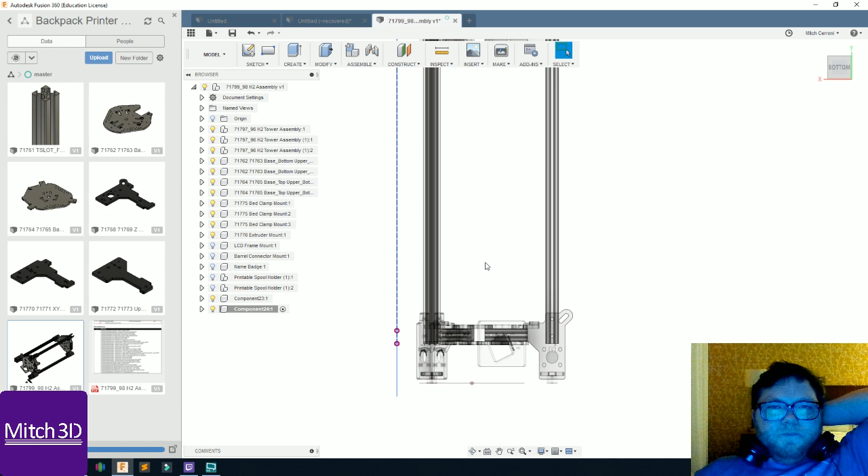Okay, so I kind of started planning a lot of this out for the backpack printer. Okay, cool. So I want to create a bird air. So first I was able to import the model from the GitHub. SeeMeCNC had the whole model of the printer in SolidWorks on the GitHub.

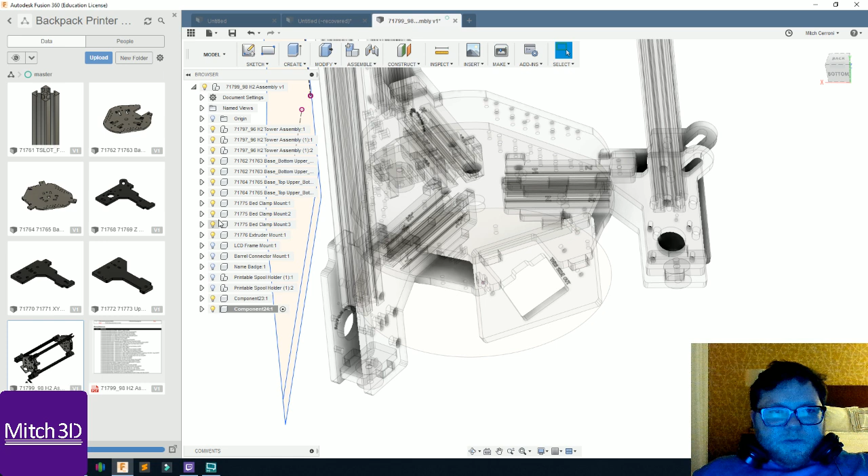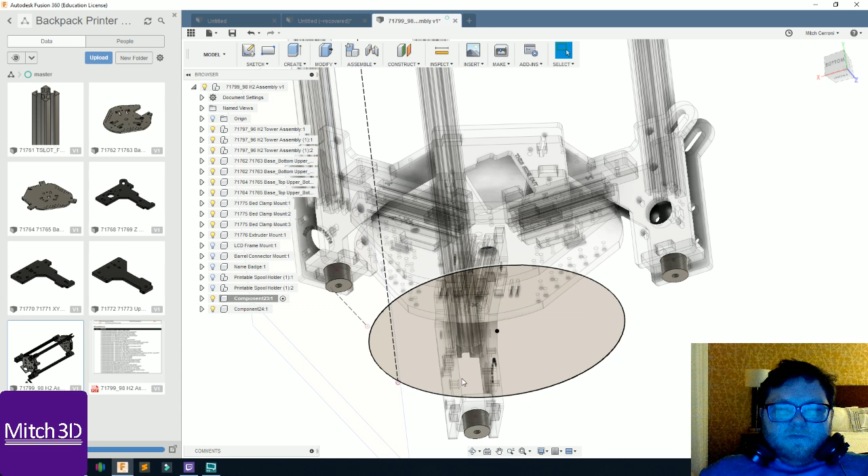And so what I did is I started sketching the frame. It's not a good sketch, I'm going to redo it. But the main thing here is that I started finding all my components, or starting making my mounting points here. So I'm going to utilize the existing feet. Let's click on activate that component. So right now we have our 8mm spacers that I'm going to mount to where the existing feet are mounted to, and then that will be mounted to a frame.

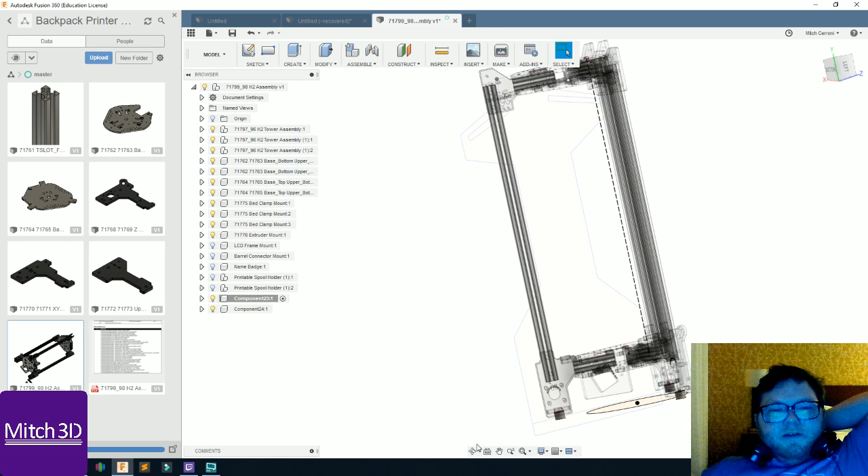I'll basically have a little shelf here that's going to be mounted to the backpack frame. So this frame, I'm still debating what I'm going to make it out of. The easiest way is going to be CNC routing it out of plywood. Since I'm going with a little more aluminum parts on this model, I'm thinking about actually machining this out of aluminum. So I can machine the plate out of aluminum. I could either plasma cut or water jet it. The main thing is to make it really lightweight.

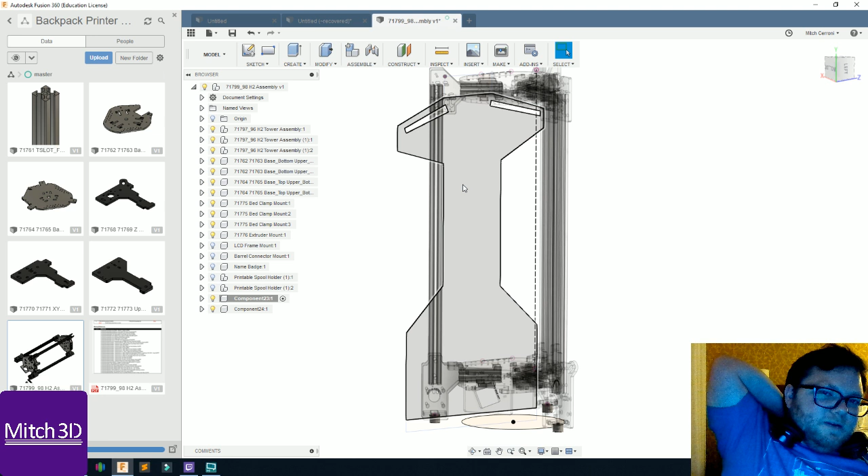So I unfortunately am not in town. So what I was going to do is put the straps on and the waistband from the frame backpack, because I have to design this to fit my back. It has to fit my shoulders the right width and the right height from between the back of my shoulder blades, which is where the pad's going to be, to the lower lumbar support back brace, and that measurement is important.

So I'll show you what I have so far. You get to see all my super duper stuff. I got this purple braided wire here, and that's going to be for my wire loom. Off camera, I made the wire whip for the effector, so I need to put this wire loom around it. I haven't opened the bird air. I just got the bird air pump, so I'm gonna run the bird air tubing through the whip and the Capricorn Bowden tube as well.

I had to get a replacement 12-volt fan because I broke the one on the Mosquito. There's those Speakon connectors here. Let's see, I got that workbench, that was pretty cool. Some robot parts, heat shrink tubing. Here we go. Okay.

So this is the frame backpack I'm using, but I'm not using the actual frame part. I only bought this because it had pre-made straps, and those straps are way more comfortable than the previous version that I had. The problem is there's so much extra on this frame that it's really cumbersome. It's really huge and bulky. Let's see if I can get a full-size picture.

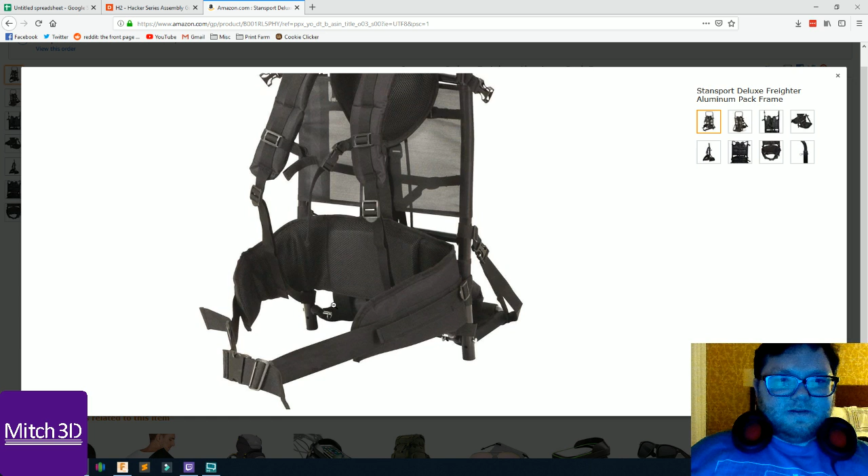Okay, so ideally what I want to do is take this middle back shoulder support and attach that. So the aluminum frame would basically only be the size of the back support right here, like the size of this square. It would probably taper up here, so this part would be a real thin part, because all it needs to do is hold the two pieces together. Even if I make it out of plywood, if this part was only like 4 inches wide, it still has a lot of torsional strength.

The idea is that the backpack frame is not going to bend on my back, and that's also adding rigidity to the printer frame. And the other important thing here is this strap for the waistband goes around the metal piece all the way back here, so this is just resting on the metal bar frame. So this part can actually come off. These two parts can be separated because they're only connected by this one strap here.

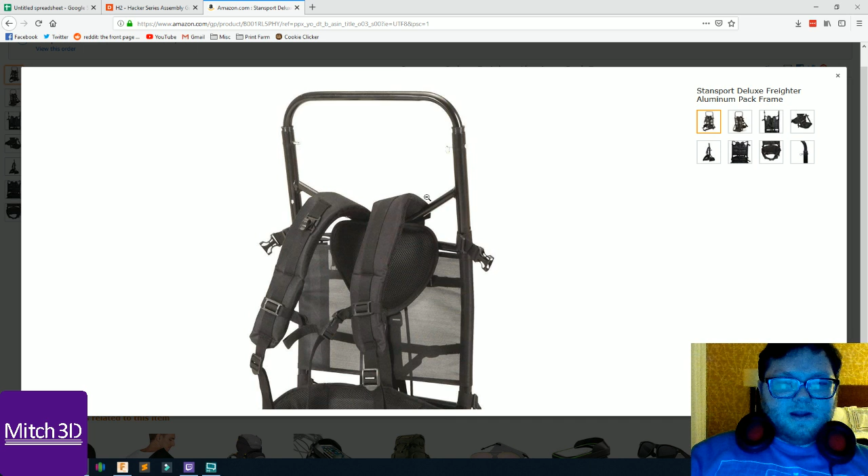And then up here, all I need is basically two little loops up here at an angle. I don't like how they do the angles inward like this way. I would actually do it outward so that it contours around my shoulder like this. It will kind of angle out and in.

Because the printer is always trying to lean back on me, so it's trying to pull my shoulder blade pads apart. So this center chest strap is really important to keep those together, because I had to constantly adjust it. The other thing too is adjustable straps here and here, and then this clasp right here is like 2 inches thick. It's huge. It's way more comfortable than what I was using

before. Before I took a fanny pack and took the straps off the fanny pack and sewed them into the frame of the backpack. But I don't like the fanny pack idea. Yeah, this has a lot of extra straps, and I mean, I get the point. It's a hiking backpack. It's supposed to carry a bunch of stuff. You can see this lumbar support is way more heavy duty than what I had before.

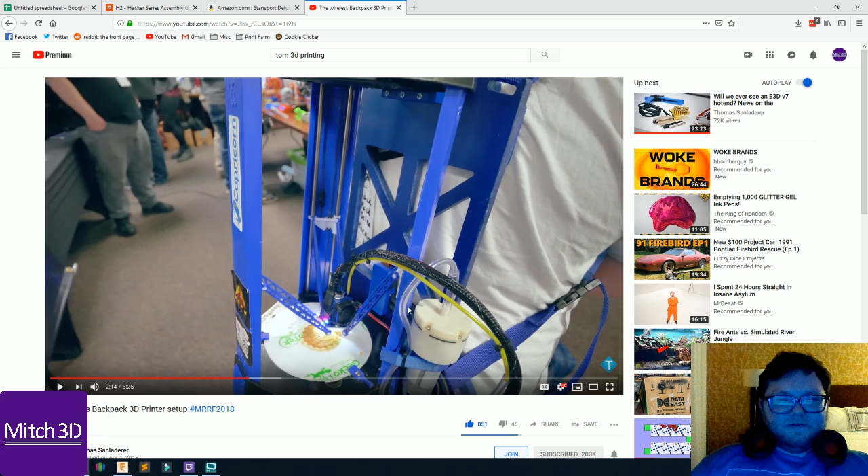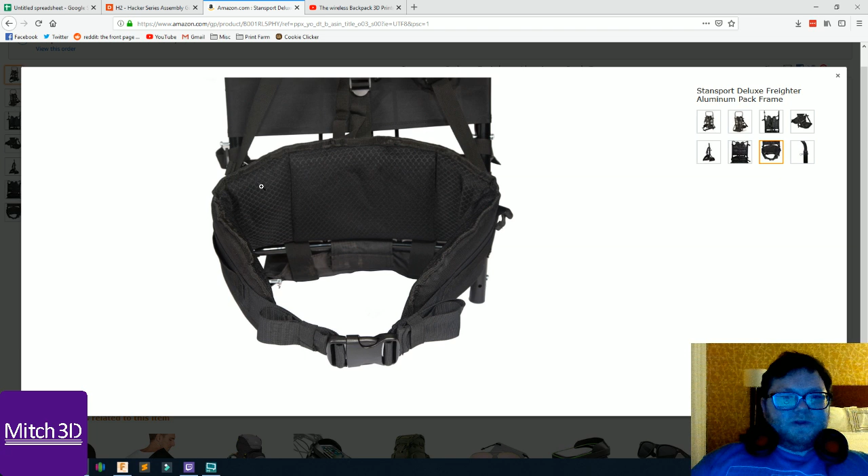Okay, so if you can see, the back support was just this wide part right back here, and so it was only just a little piece. It was a piece of foam. Here it is. So you can see I added a bunch of foam as kind of a padding spacer here to bulk up this area, and I made these little winglets, which are supposed to be kind of what this is right here. But I didn't make it big enough. So really the straps are just digging into my waist, and again here, the straps are just digging into my side.

I couldn't think of how to do that. And my roommate actually was the one who sewed these together. But the problem is she had to sew them after I completely built the frame, so she couldn't get her sewing machine close enough to make these straps tighter. And so I didn't have a lot of adjustment, and I had buckles for each side of the strap.

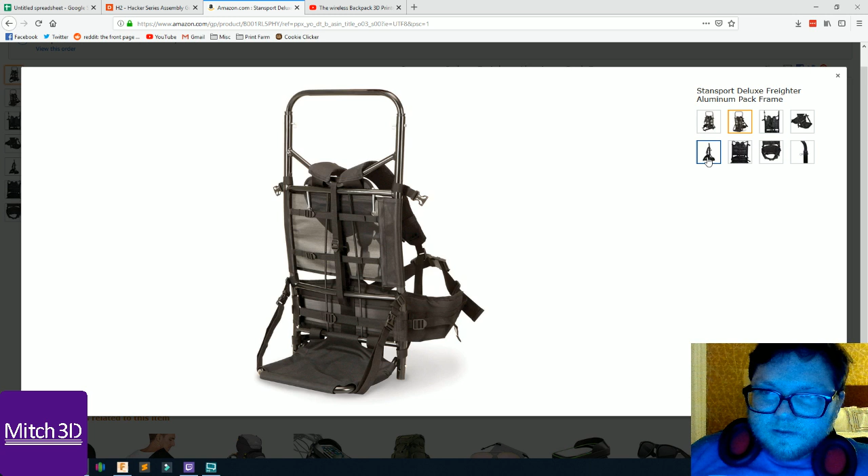This one doesn't have those parts of straps. So I actually do need little loops at the corner of the bottom of the frame. So I'm probably gonna have to make little hook loops here, a loop here and a loop here, and then strap the loops here to that loop. So I might have to cut these open and sew them back, or stitch them, or probably rivet them back.

So the idea is that I'm not trying to do a lot of modification. I want to be able to take the strap parts off the frame easily. So this will probably be attached with, I don't know if I'm gonna try to sew in, I forgot what they're called, but the eyelets basically. So I could use carabiners, or some kind of hook and latch kind of system.

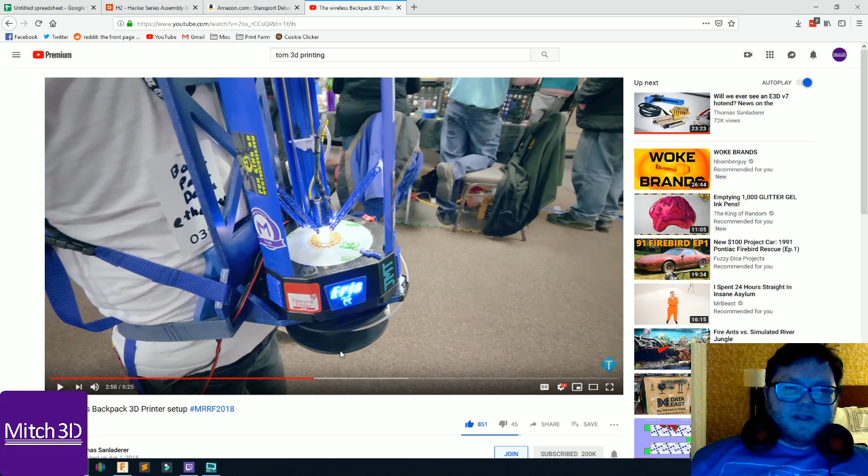I thought about just sewing Velcro to the back side of each one of these and just Velcroing the pads on, but that means the whole thing would be held on by Velcro, or it's only going to be held on by these two straps here, and this bottom section is just going to be pushing against the back. So it seems like all the weight's basically pushing back against my shoulders and on my lumbar. So the more cushion I have, the better.

The other thing that was annoying, let's see if I can find it. I'm just seeing how cool that was. I made that adapter with the Berd Air, and I'm hoping to do that again. But anyway, the annoying thing too is right here, I had a little tiny piece of foam between my shoulder blades, and it kept getting in the way of my shoulder blades, because it was rigid foam, EVA foam. So anyway, hold on, let's see.

So anyway, if you have any questions about the backpack printer, let me know. Because I never really did any documentation on this backpack printer build other than this video, and honestly, this video did a good enough job that I really want to just republish this on my channel. I'm gonna have to email Tom about it.

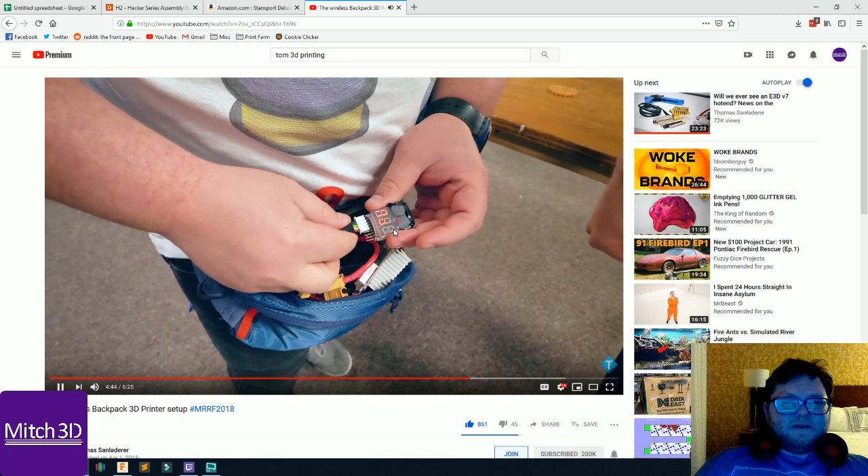So this is the fanny pack. I used a DC to DC converter. All of this was in batteries here, about 16 volts. The 5-volt regulator on my Rambo board will probably fry if I did that directly. So those alarms are super loud. A 5-volt regulator. My USB output was from my Pi. And you're getting the voltage monitor as well.

I'm using all the XT60 connectors so that it doesn't break. It just gets a little warm. I'm also using the fanny pack to hold my glue stick, business cards and my maker coins. So you're a mobile printing machine. It hasn't been too uncomfortable. I've been walking around this convention 3 or 4 hours and haven't had any problems wearing it. How much does that weigh on your back? I haven't tested it, but I'm assuming probably like 15 pounds, 6 or 7 kilograms. That's annoying.

Okay, I want to create a box that has, let's see, battery and electronics mounting. So I want to create a box that has kind of like, I want to take the same LiPo batteries, but I want to have them in a cartridge, kind of like that, but simple. And what I was going to do is, without having to resolder anything, let's see, let me create a new file.

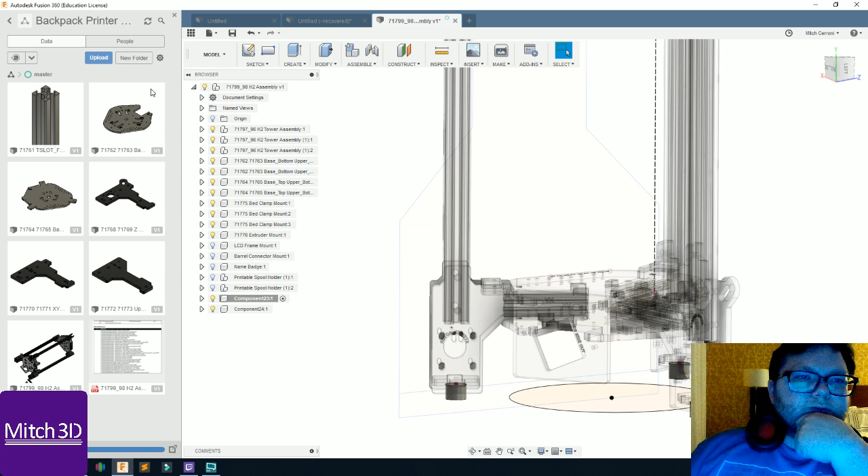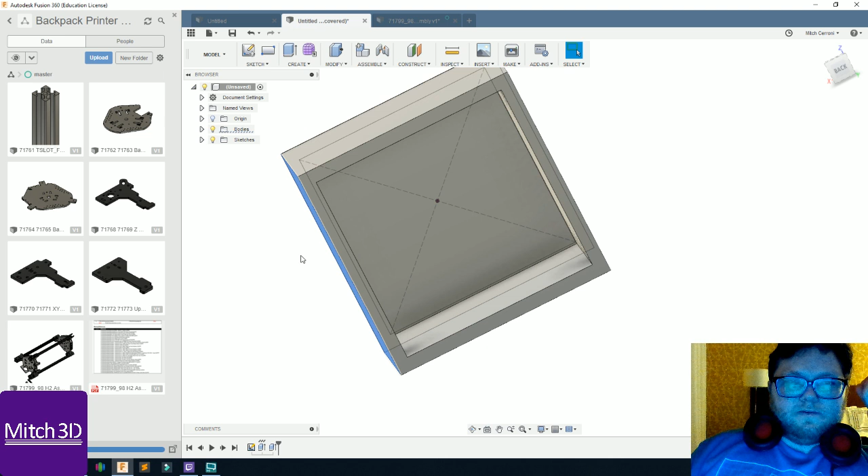Actually, I started one. Okay, so this is part of a model that I created. This would be an end cap. This end cap would stick onto the battery, and then inside here I would have... Okay. So I want to create a rectangle. Let's see. I can't spell, but anyway, using this as a reference. So it's 15.735 by 8.126. 8.126. 15.735.

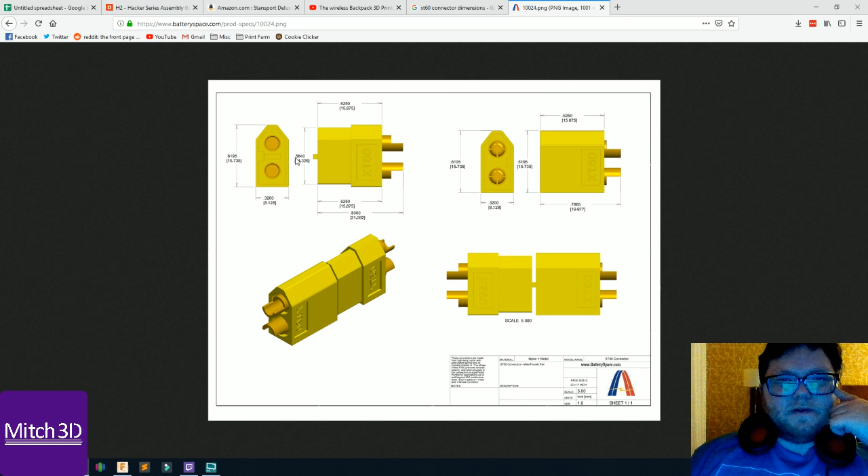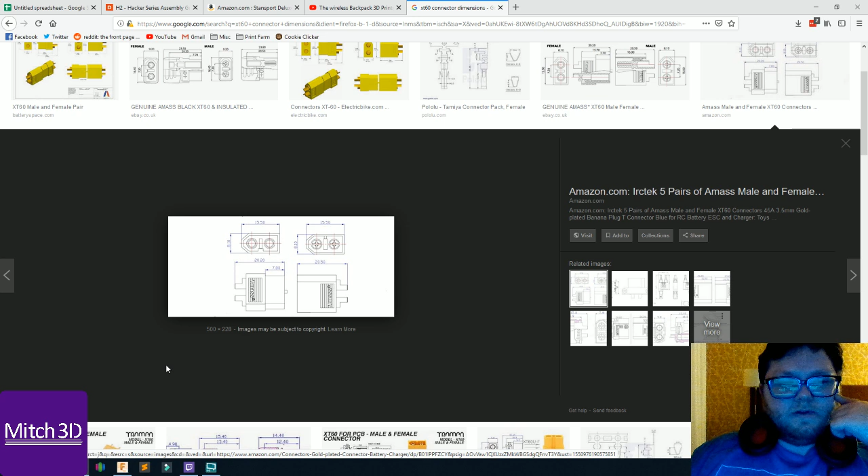Okay, the only thing I can't figure out, and it doesn't really matter, but it kind of does, is the taper here. I don't know what that taper is. It doesn't tell me where the taper starts, what angle it is. It looks like a 45-degree angle. And yes, I could probably import a model into Fusion, but that seems kind of complicated. It tells you where the center points are, but it doesn't tell you where the taper is. So, but just for prototyping, I want to try this.

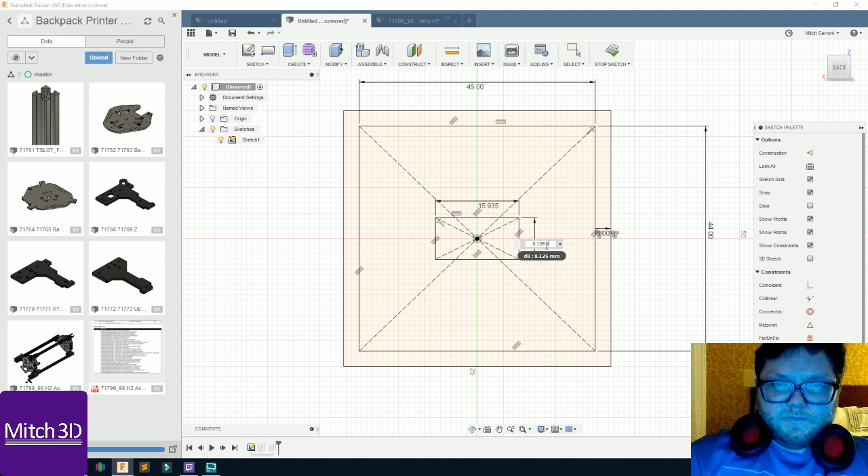So if I make this, I want to round up a little bit because I need tolerances in my model. Let's see, 15.735 plus 0.2. That way we have a standard tolerance. Okay, cool. So we have a little bit of tolerance, and what I'm going to probably do is add a bead of hot glue around. So let's see. Okay.

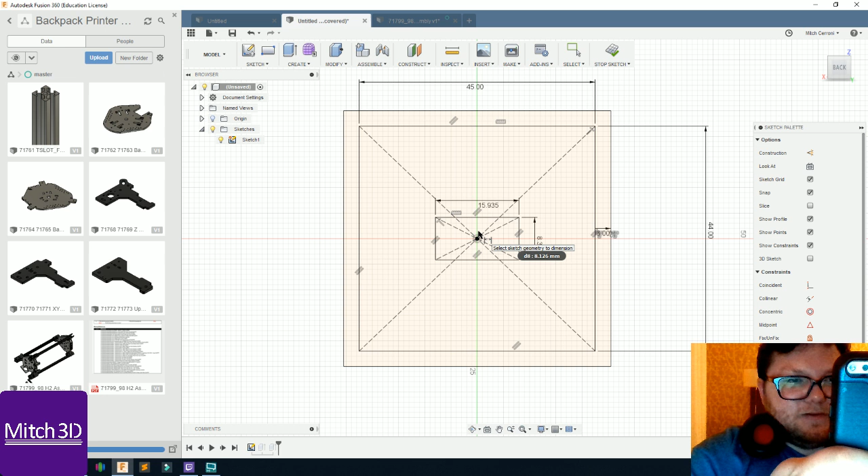Wow. That's awesome. Friends having a party, and it's really neat. With a DJ and a light up floor. Okay. So I can't do streams because I'm so distracted.

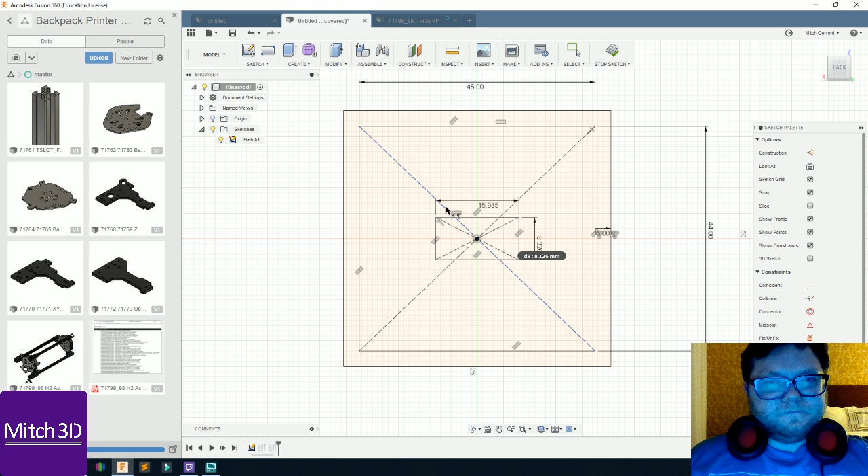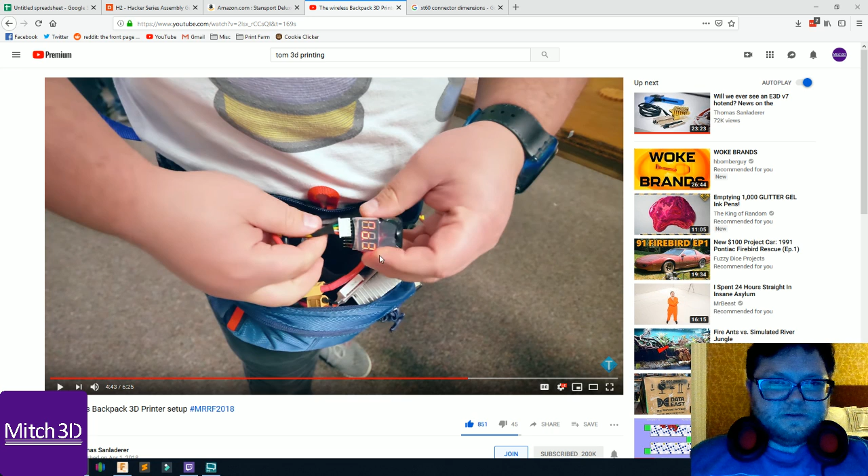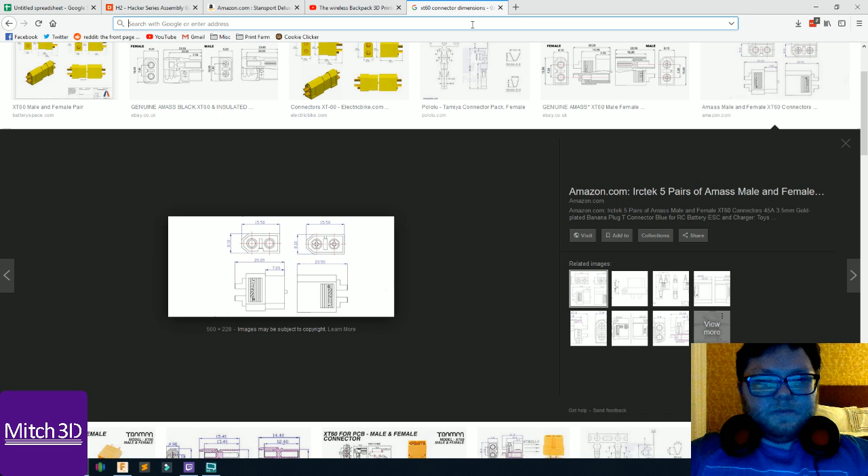Okay, so the other thing that is an issue, what I want to do, this sounds like a pain in the butt, but these little alarms right here, these alarms have a 5-pin connector for a 4S battery, so ground, and then the 4 cells, and then it measures the voltage per cell. So I need that connector right there. LiPo balance connector. Dimensions. What are they called?

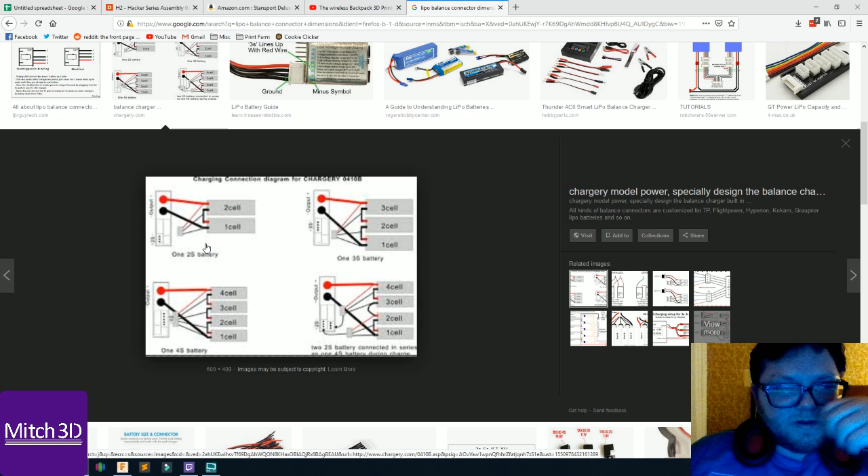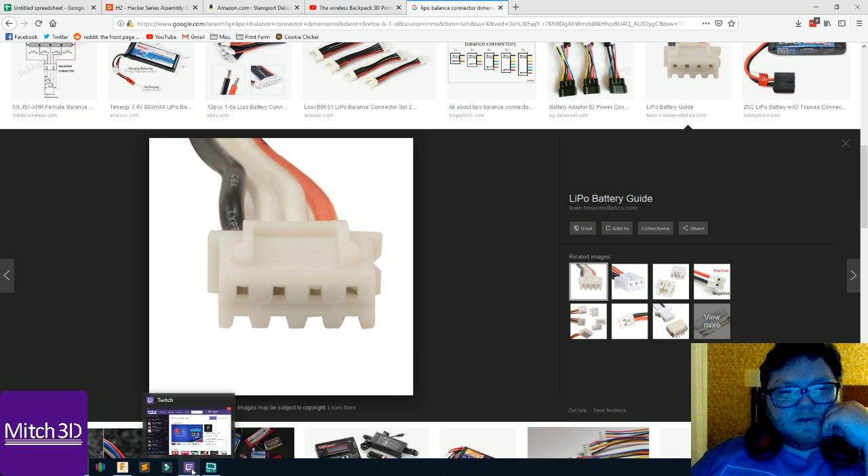Okay, they're JST. Pretty sure they're JST style. Again, I don't have the model of them exactly on me, but since it's parametric, I can just go back and fix it. I think they're probably about 3mm by 5mm. I was going to say 3mm by 6mm. They're real small, so I'm gonna just add a...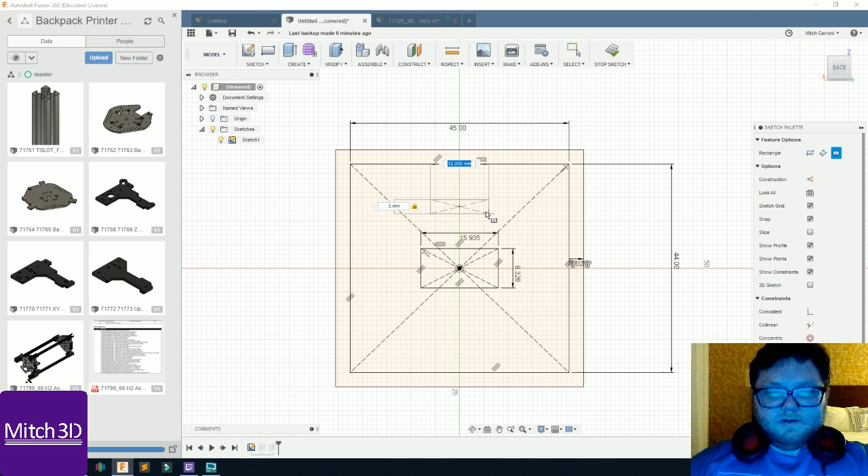That's probably 8, 3 by 8. Okay, so anyway, I'll make that bigger.

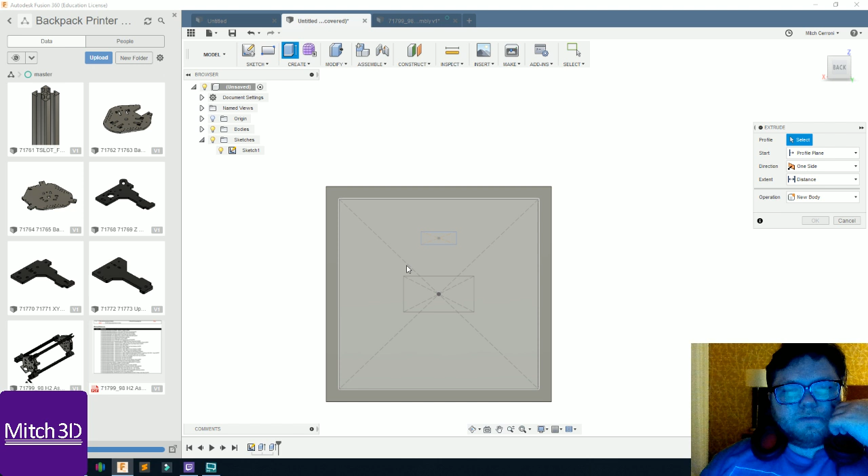So stop sketch, and then we'll push pull. Trying to figure out a more efficient way to navigate this, but okay.

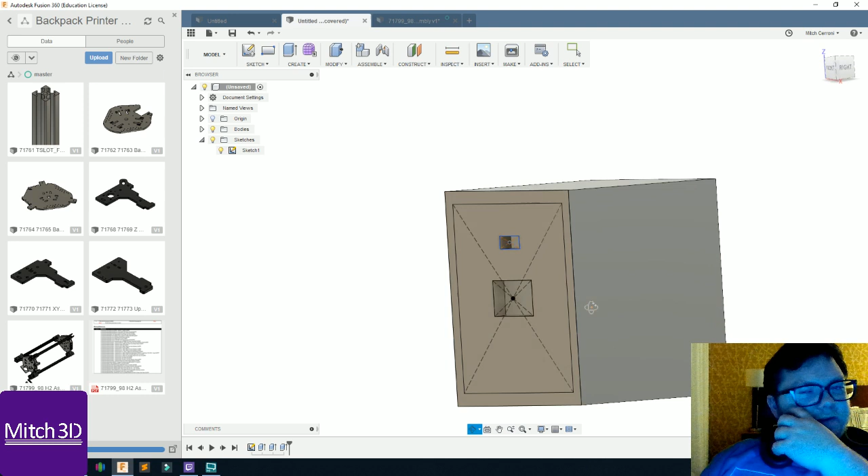Ideally what I'm going to do is stick this on the end of the battery. Just going to show you what these are - Turnigy energy, 5000 milliamp hour 4S battery, hard case.

Yeah, they were really expensive - not the graphene ones, but the cheaper ones, the 20C. They're actually cheap, but the problem is they're out of stock, and when I could get them, the shipping was expensive because it was from China. It wasn't actually from - let's see - Turnigy. So, not that I'm going to get it done by then.

I'm going to use the same battery system as I did last time because the printer is going to draw about the same amount of current at the same voltage.

Those are about 27 each, and there's the link for them. So I have two of these. I put XT60 connectors on them, and then I ran them in parallel, so I have a Y connector. Looking at Tom's video, he uses a diode system.

Oh, is it Friday night hangout chat? Oh, man, I didn't know about that. I'm in all the chats, but not that one, apparently. Askew View, he's doing one. See, I don't get push notifications for some reason.

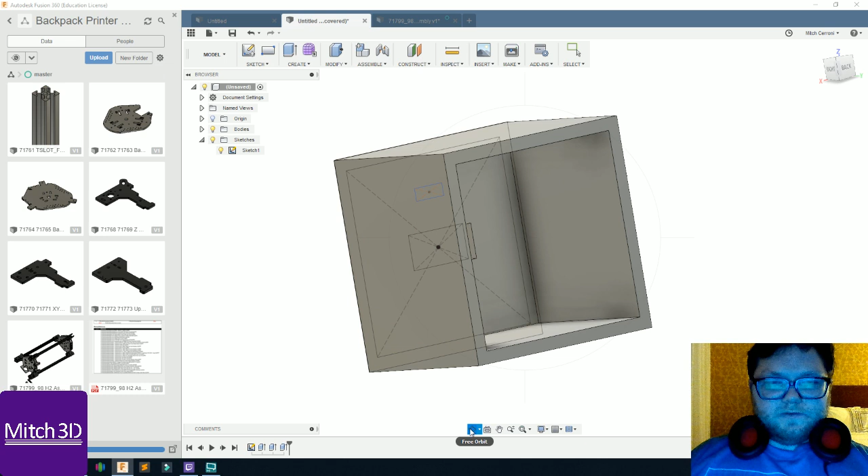But anyway, I just wanted a short breakdown of this video. I'll probably be CADing while I'm on the other stream. But I just want to show you kind of what I'm doing. So the other thing I'm going to do is probably chamfer these edges, and then build a receptacle for this, so this will actually plug into a socket, and the socket will have another XT60 connector.

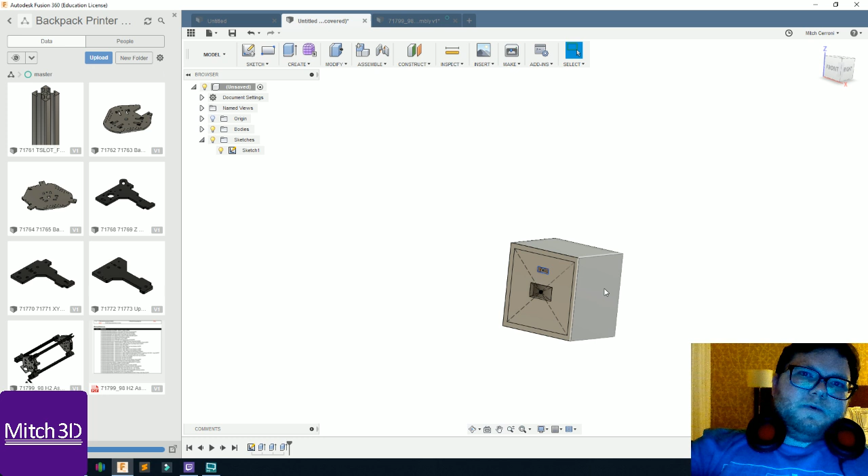The idea is I was going to put a little strap, a little handle, like a Velcro strap or something, so I can pull the batteries out for a quick release, because I want to be able to pull the batteries out quickly, swap them, take another one, put it in like a cartridge. So I want to make a battery cartridge system. I was thinking of adding a little detent on both sides so it locks in place, but the XT60 connector is actually pretty strong, so I could probably just push it in.

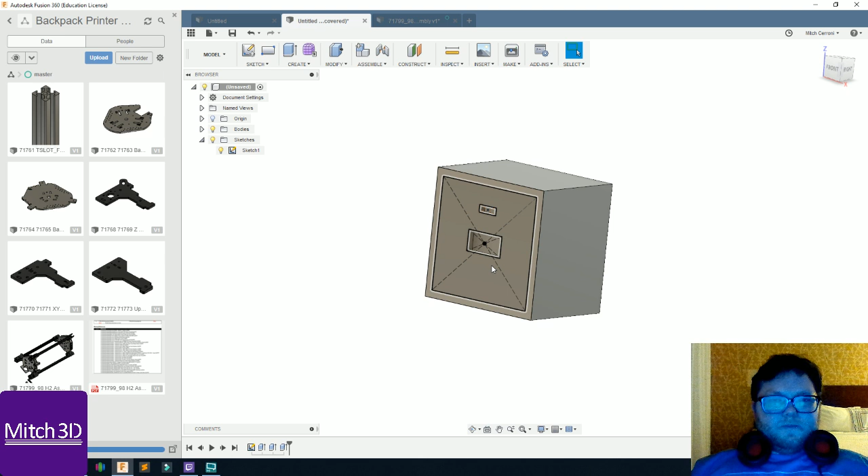The thing is, the battery box has to have the electronics in it, and it's going to probably be mounted rigidly to my backpack strap. So it's about a kilogram, so it's a little bit of weight. So I need to put it on something that I can have reach to.

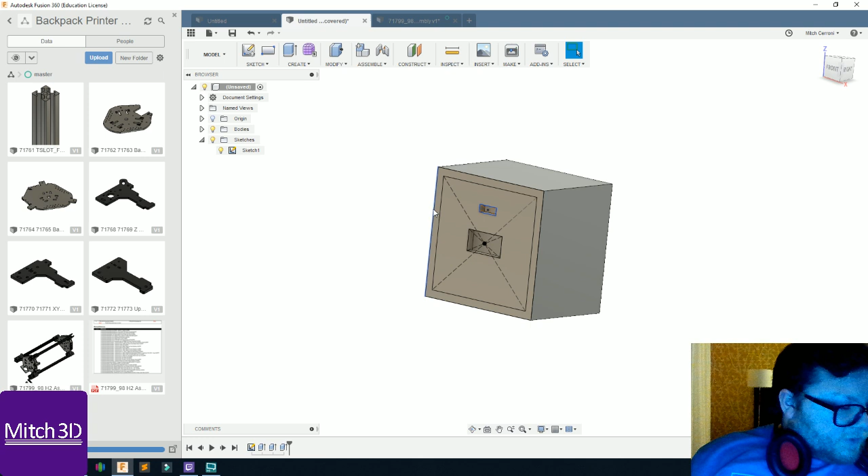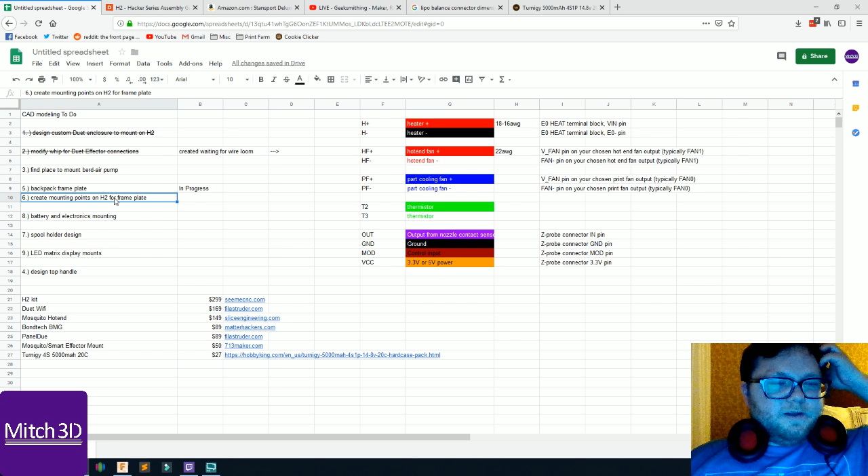Anyway, I just want to show you guys I'm actually making some progress on the backpack printer today. The other critical parts I have to work on next are the battery box, backpack frame, the mounting points - I've kind of figured that out - and then the Berd-air pump.

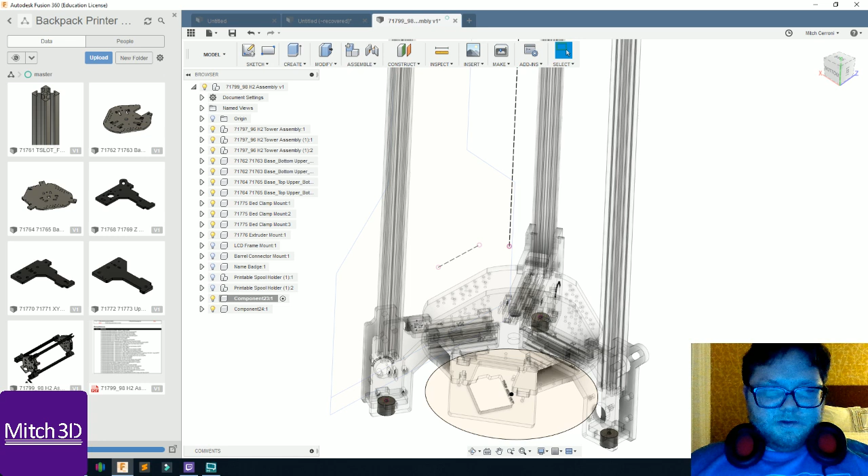So I need to find a good bird air model so that I can make a mount from it, because I'm going to mount this bird air pump right here.

I have one specific place to mount it, and it's going to be right next to the backpack frame, hidden out of the way, so the tube can go up to the whip. The air tube can go up through here, meet up here where the whip's going to be, and then go through the whip to the extruder. So I'm going to work on this mount.

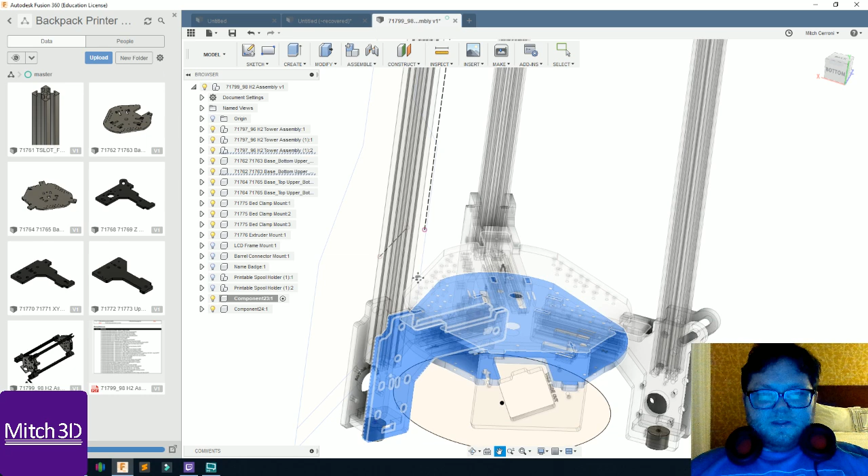It should be pretty simple. It's going to mount to these holes, but I need to modify an existing mounting point, and that existing mounting bracket is going to also be used for other things as well.